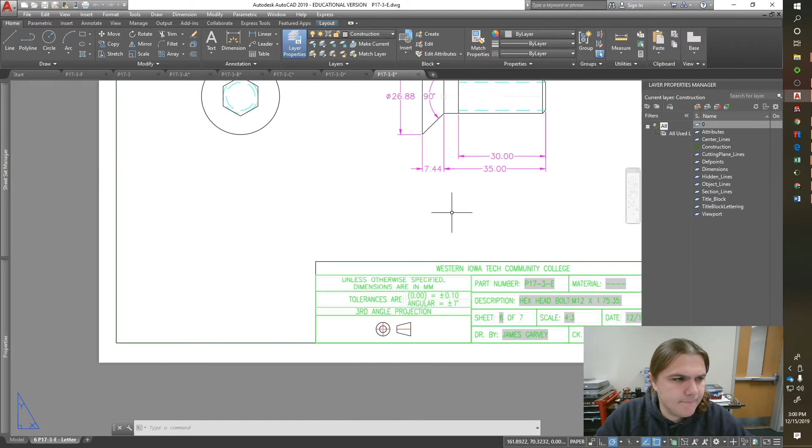And then now I'm going to open up all my drawings. So holding down Shift, I can select all of them and hit open. I'm going to get an error on this one because I was playing with the sheet set, so there's a field on it with the sheet sets earlier, so you can ignore this. This shouldn't pop up on yours. I'm going to, just for my own OCD, reorganize these tabs so they're all kind of in order.

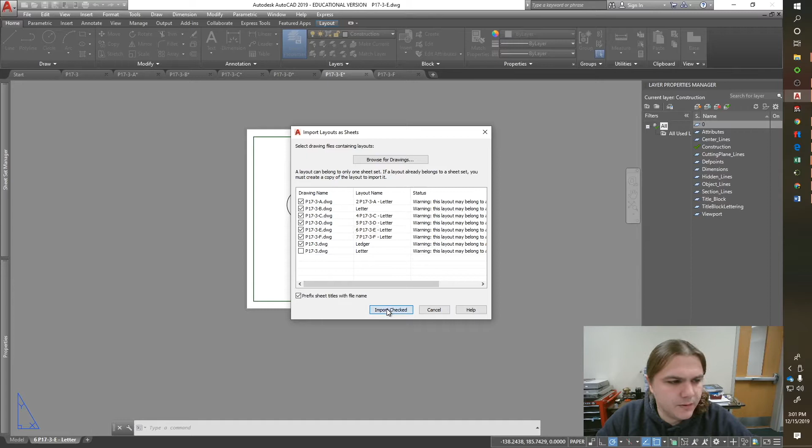And then now in my sheet set here, right clicking, no matter which one, so either on here or up here, I'm going to right click, import layout as sheet, and browse for drawings, and select all of these. Now I don't want the ledger on these, or I could rename some of these, but here I do want the ledger on that one. I'm going to import selected or checked, and now those are showing up in my sheet set.

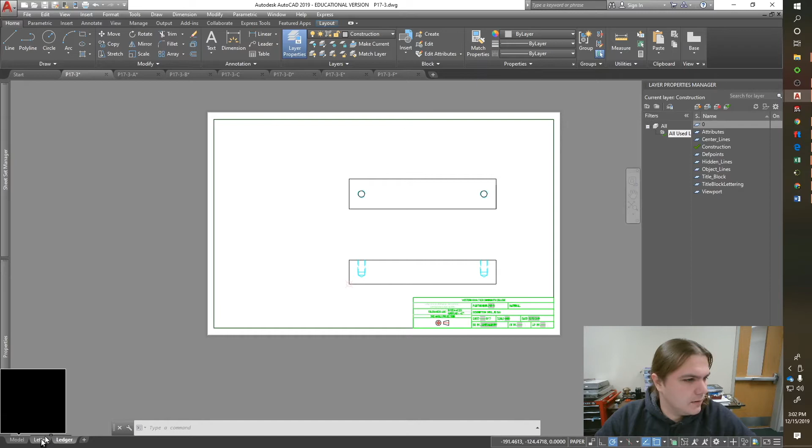Now if I double click on any of these, it will pop over to that drawing. And then when I'm done with this, I'll show it's just a right click on here, and then we're going to publish. Okay, so this is my P17-3, that's what I'm calling my assembly. I'm going to jump over to this one in a second. I just want to finish up what I've kind of started with on this last one here, what I've done with all the rest of them.

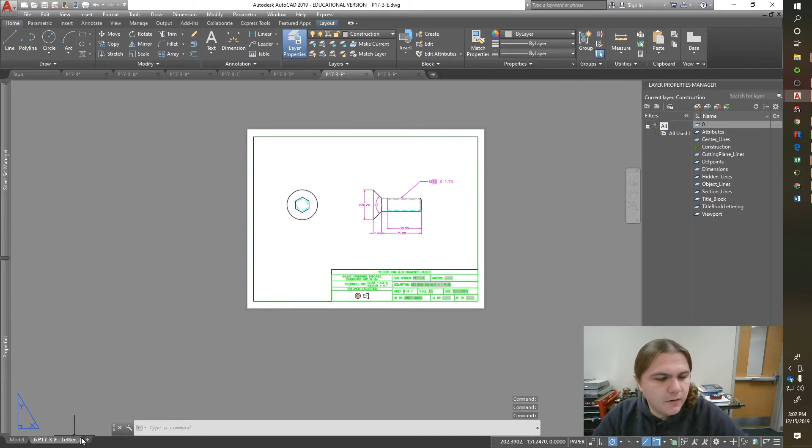I'm not going to cover the dimensioning, that's something you already know how to do. So what I have on, say, this one here is this little point, which I uploaded the templates again, and it should have this on here with kind of a brief description of what I got going on. This point is a block.

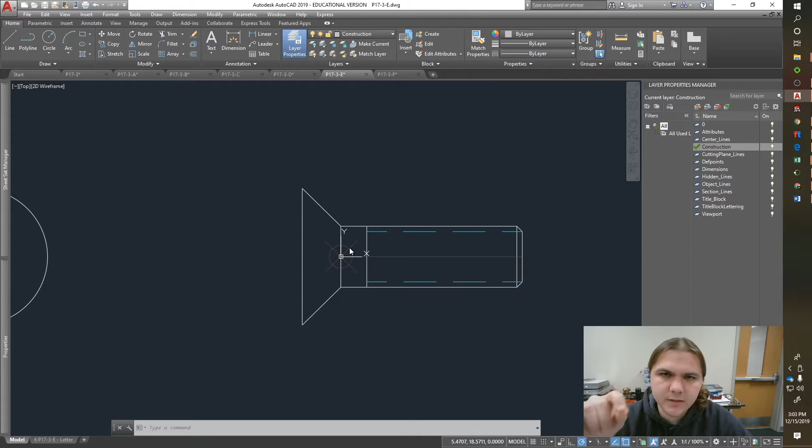If you type, which I'll demonstrate from the start in P17-3F, this block has attributes in it that we're going to use to generate our bill of materials on our assembly drawing. So I'm going to come over here and start from scratch. I'll make a new layer, attributes.

I want it not to print and all that, so I'm just going to give it a random color here. I'm going to type point, which I don't think I got my style set up on this one. There we go.

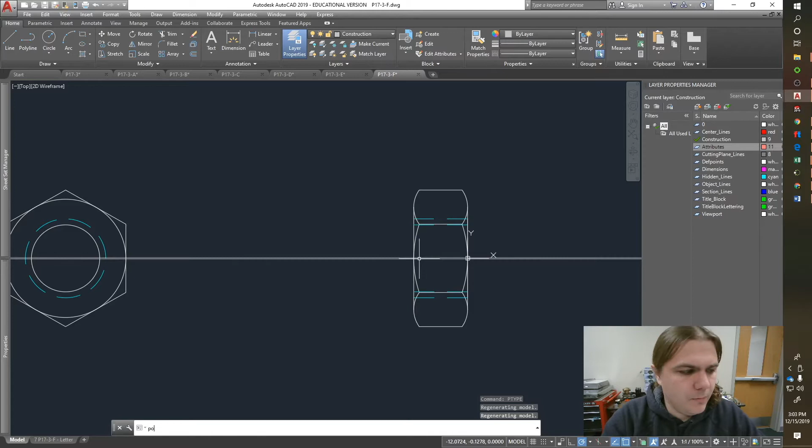Point, put it at 0,0, and set it to my attribute layer. So now what I'm going to do is type block. I'm going to name the block the same name as the file, because that's going to be part of the BOM table when we start that up.

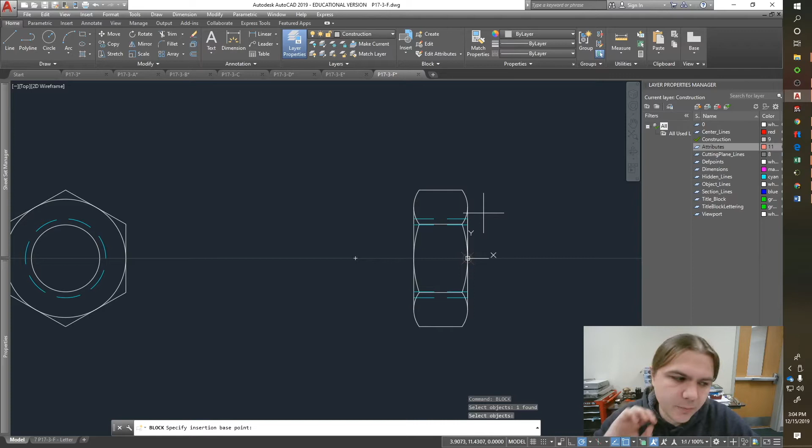P17-3-F. Now it wants me to select objects, so I'm going to select my point here, and okay. Now it's going to ask me the insertion point of the block, or the base point of the block. So I'm just going to click on the block, and now it goes into the block editor.

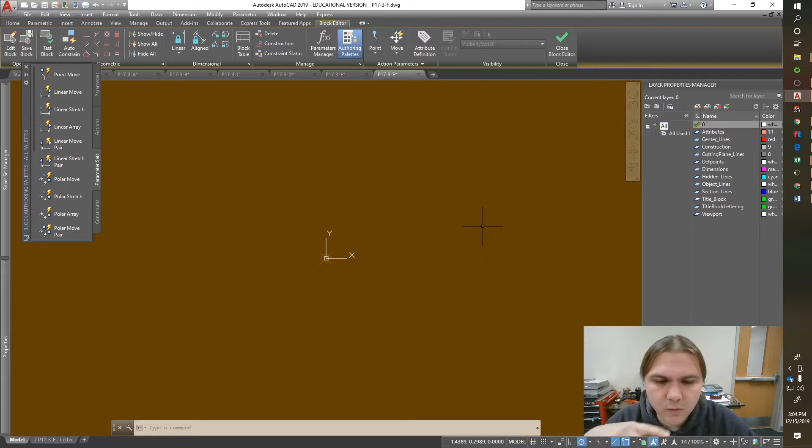The block editor can do a lot of interesting and cool things, but for the time being, we're just going to use the attribute definition. I have another video I'll kind of post around here. It kind of goes into more using the block tool as the whole part instead of just the attributes. There's some ups and downs on using that. I think if you want to try it, I'll share that video in the description below.

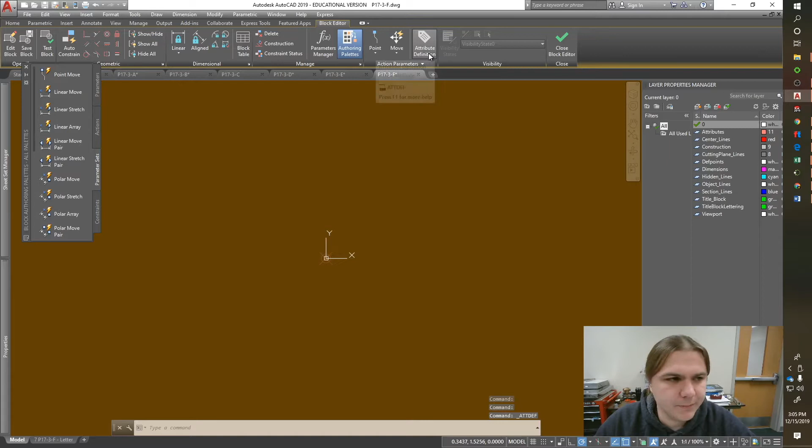Okay, so I've just clicked on attribute definition. So I need two attributes that I want to have associated with this part. I want the description, and well, in this case I wouldn't have one, but I'm just going to do it anyways, is the material.

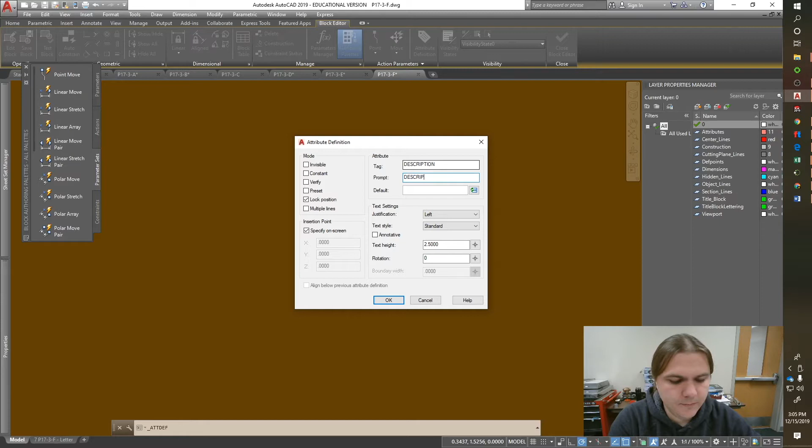So the name of it is, I'm going to just double it up. And then the default here is where you would put in the description of the part, which in this case, this is the hex head nut. So I'm just going to put in hex head nut, colon, and then I'm going to put in some of the details about it, which is an M20 by 2.5, which is the pitch.

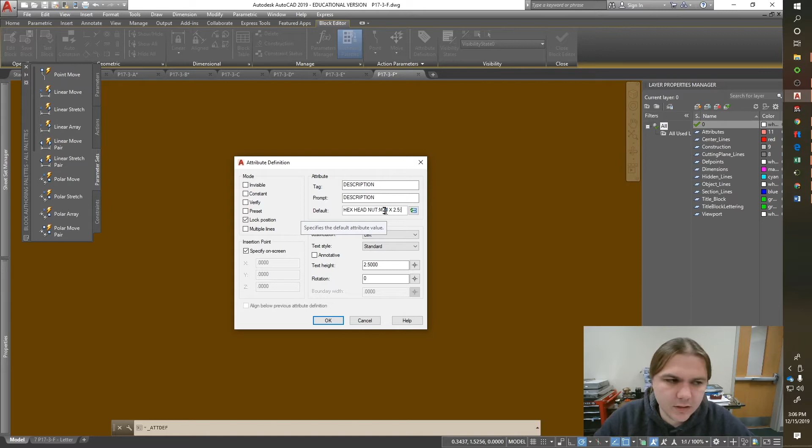I could go into, I can use fields in these too, so if you want to have the diameter, the width, or the length of something drive the dimension, you can just right click in here and insert field. And then usually from there, go to objects, object, select the thing, and then pick the property that you want to kind of have driving that area. I'm not going to do that in this instance. I'm just going to have this here. I want it to be invisible, so it just won't show up, and that should do it.

Now it wants me to place it somewhere, so I'm just going to place it there. I guess since it's invisible, this part doesn't matter, but I'm still going to set this to my attribute layer. Okay, so that one's done.

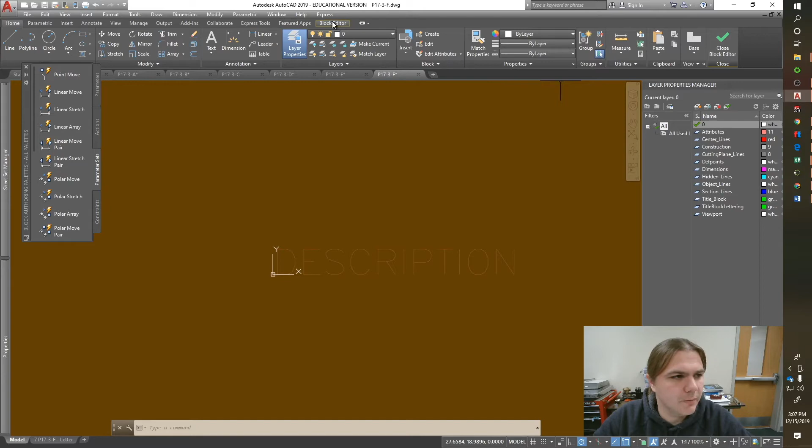I want one more. I'm going to go to, oh, it's the wrong tab. Okay, back to my block editor. Attribute definition. So in this situation, I wasn't supplied a material for this nut, which could be zinc or steel or whatever. This is where I would put that. So other parts define what the material of each part is, so that's why we're going to put this attribute in here.

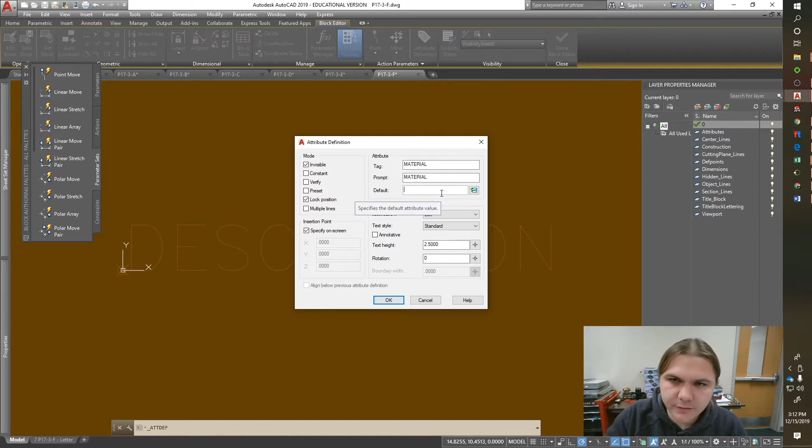The template that I'm supplying has these in there, so you won't really have to go through this if you use that template. I just want to show you how I did it. I'm gonna hit OK. Place my material block attribute. Do a match properties and make it the same layer, and then close. Now I want to save my changes.

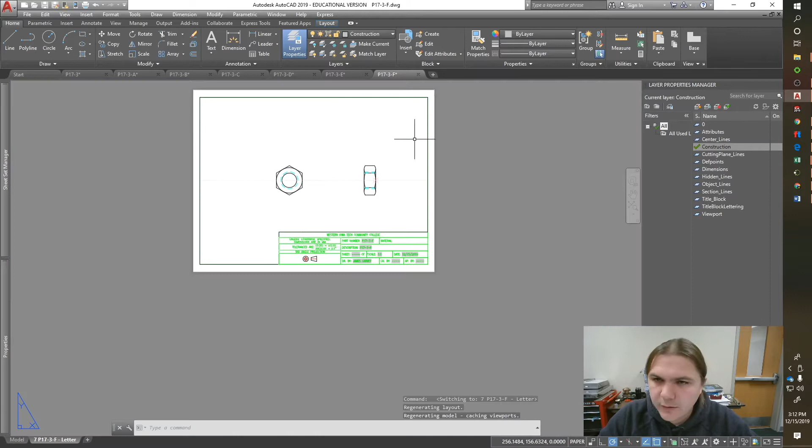So from there, then I'd go in and I'd dimension my part, and now I'm ready to start assembling the assembly.

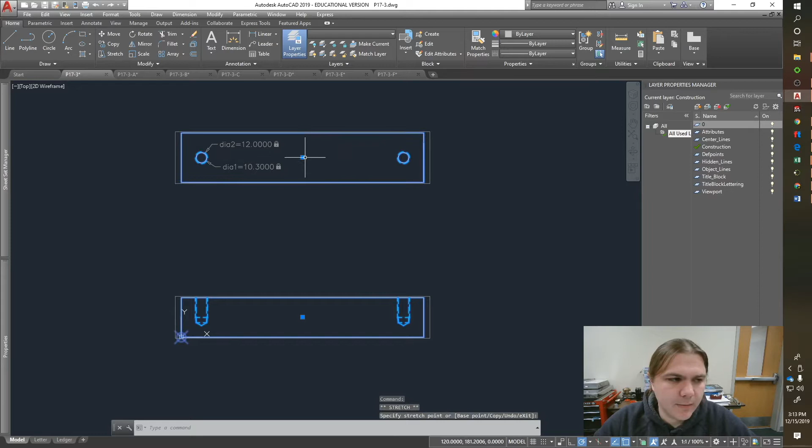What I'm going to use for this method is groups, just to keep each part grouped together. So I'm not having to worry about accidentally deleting a line or covering something, and making it maybe a little easier to select each individual part.

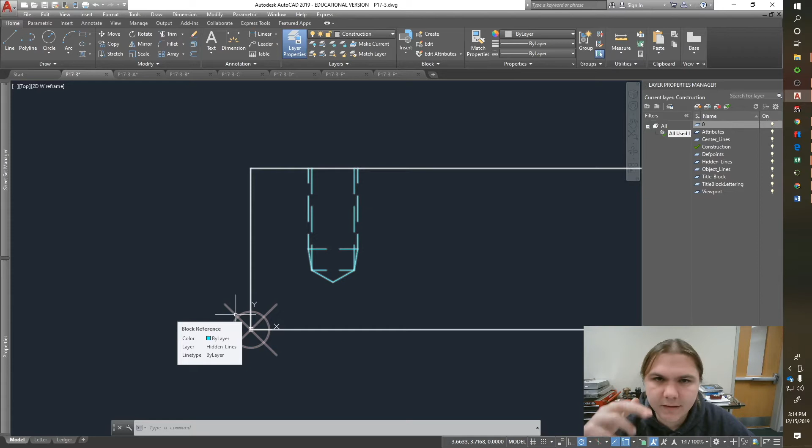That point there, that's basically all the information of each part. If I copy, say, that washer—no, sorry, that wasn't a washer, that was a nut. What I need to be careful of is if I'm copying, say, a bolt from the front view and up to the top view, I got to make sure that the front or top view only has one of those has that attribute block, because if both of them had that in there, then that's going to count the bolt twice, even though it's only in there once.

So I'm going to run through how I'm going to put this together. I got this already in there.

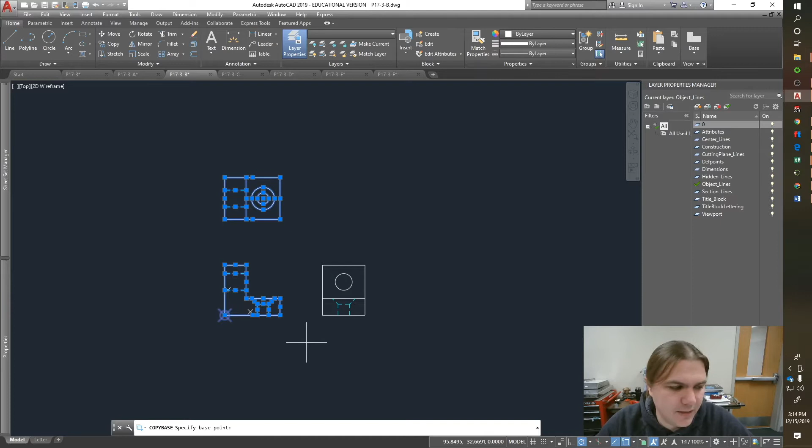With this bracket, I'm only going to need my front and top view. So I'm going to do a Control-Shift-C, which will give me an option to select my base point. So I want my base point right here. I'll right click, that's not going to do anything, so I'm just going to click here. Now I'm going to paste it into my assembly.

Plop it really anywhere, and I'm just going to group with just G the front and top separately, so I can kind of move them around freely and place them where they need to be. In this case, this needs to go right there. And then let's see if this works.

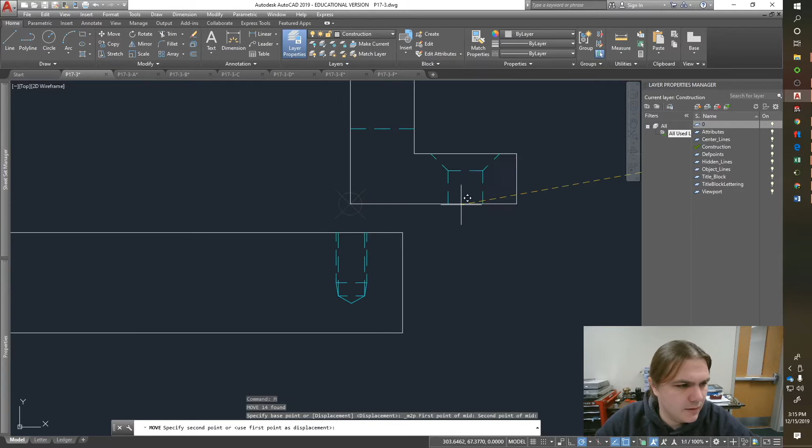Move, snap overrides, mid between 2 points. I just saw this one today. So from here to here, now I'm in the middle of there. Let's see if this allows me to do it again. Nope, so you can only do it once, of course. AutoCAD has something cool and then immediately ruins it.

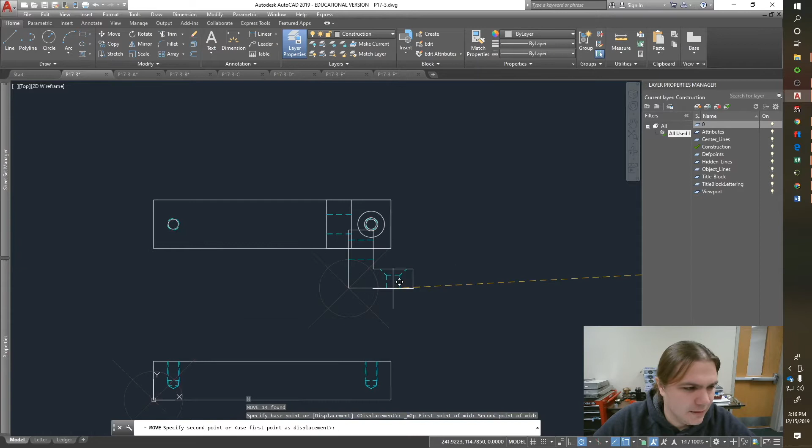Okay, move, right click, mid between 2 points, and then I will just drag it from there. Okay, that wasn't too bad.

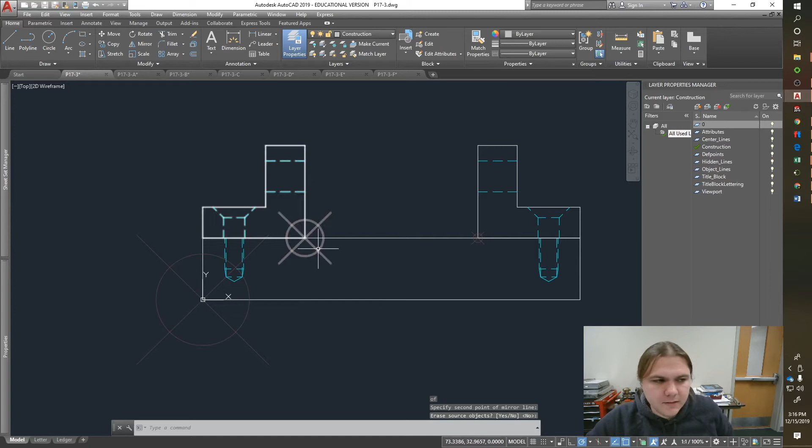So now I need two of these, so I'm going to mirror this about the midpoint of that. This would be a case where I want 2 of these attribute blocks in the assembly, so when I do my bill of material, which I'll get to, and you'll see why I'm doing this, I want it to count 2 of these.

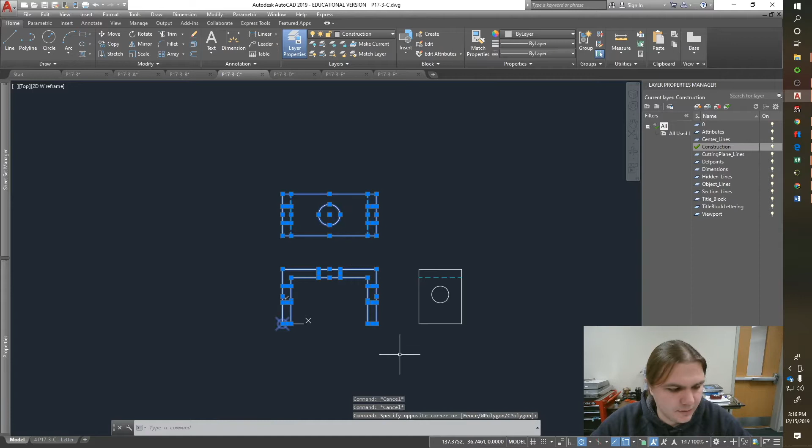So going over to C, I just need the front and top again. Copy. Oh, I screwed that up. I want to do Control-Shift-Copy, and let's think here. Where'd be good? Okay, that's right. That wouldn't let me do that.

I'll copy from there, Control-V, and I will place this in here. I guess that didn't really matter where I had my base point.

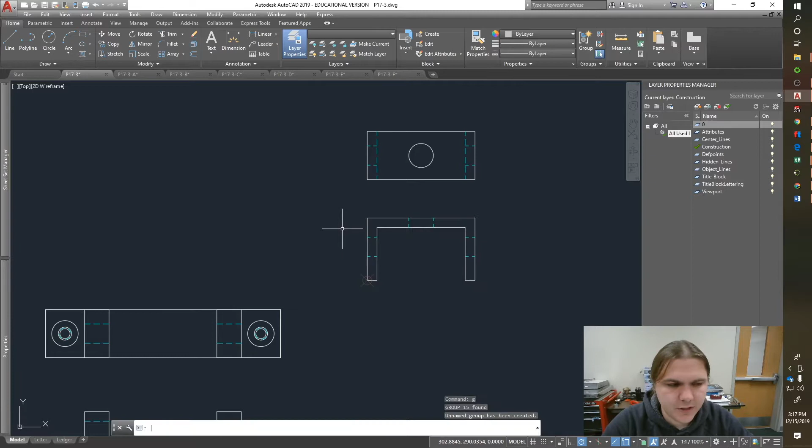I'm going to group it, I always want to do GR, it's just G, and I will move it into place.

Let's see here, between 2 points. All right, so you just keep on repeating this process of copying and pasting. I'm going to do one more here with the nut, the bolt.

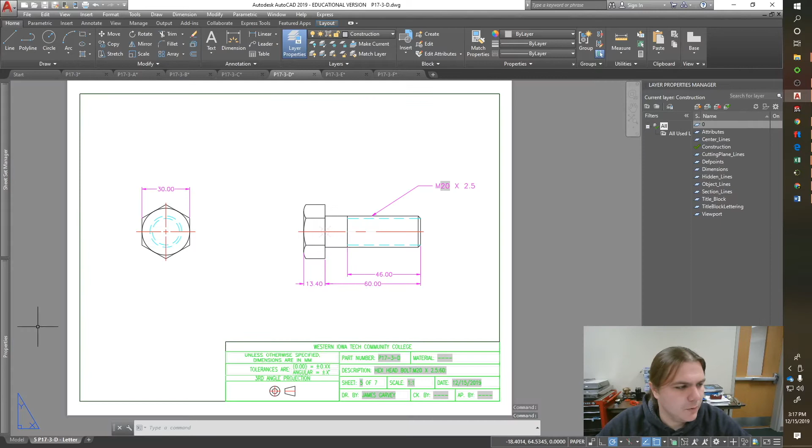I only need the front view on this one, so Control-Shift-C. Paste it in, group it with just a G, do a quick rotate and move.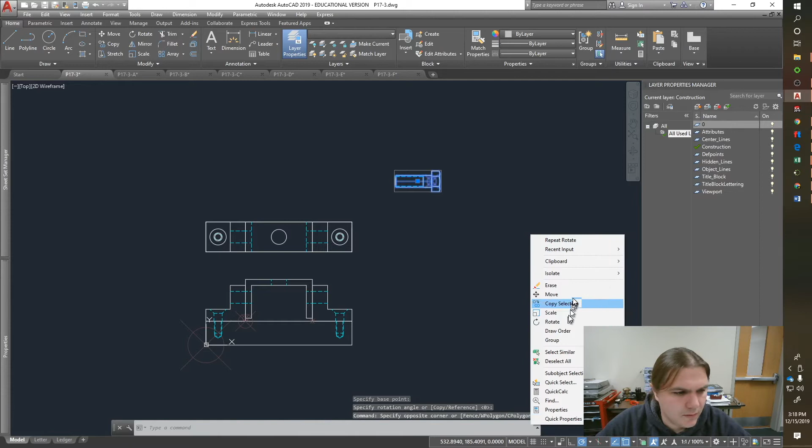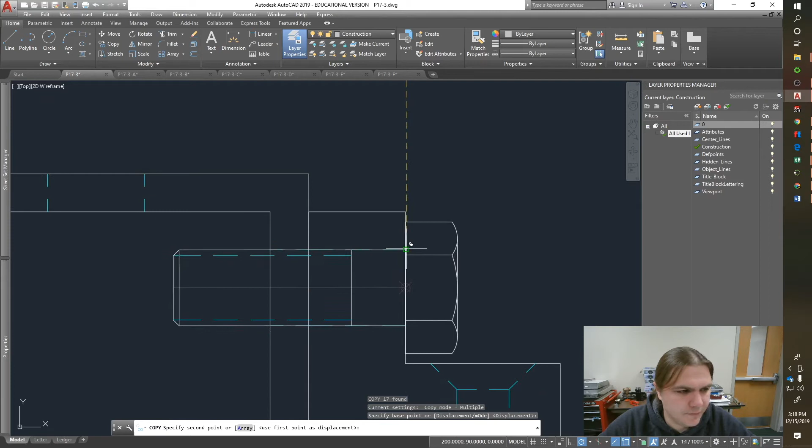Place, copy. Okay, so this is where, now that I'm copying it from the front and top, I have two of these attributes, but this is the same part, front and top, so there's only one of them in here currently, so I need to get rid of one of those.

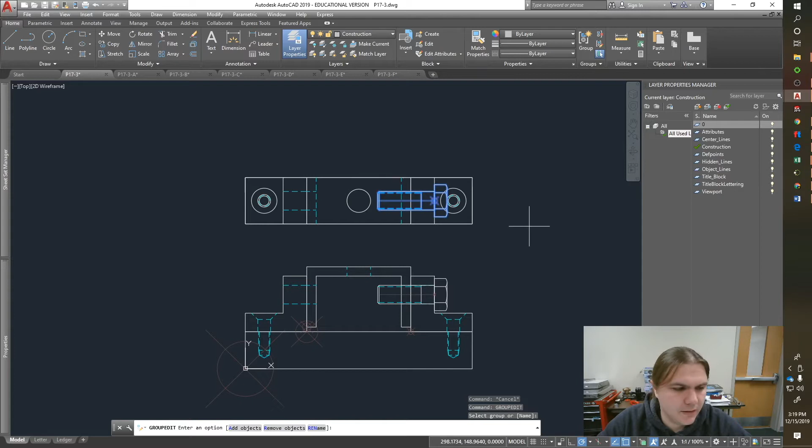So I'm going to do a group edit, group edit, I'm going to select, let's do the top, and I want to remove objects. I'm going to click on this, that just gets that outside of the group, and now I can delete it.

Okay, so from here, I'd keep on adding in my parts, and when I'm done with it, I want to do a section view of the front view, and I'm just going to have no hidden lines on my top view, because having the hidden lines there in this instance really doesn't help me.

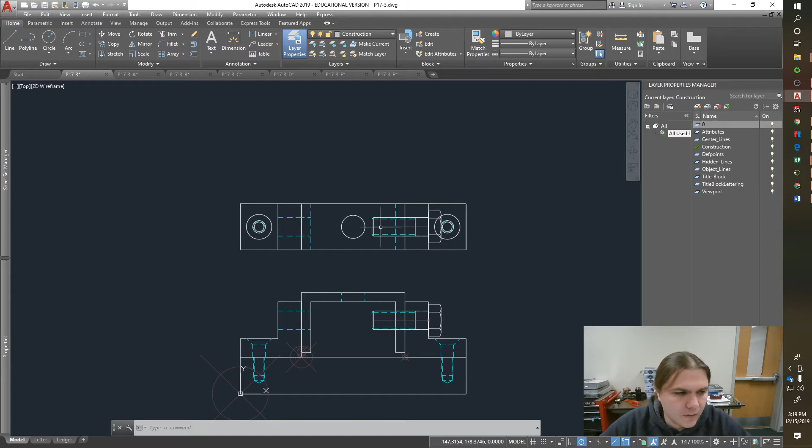So in order to trim things out, you can keep things in groups and trim them out. So if I select this group here and hit trim, I can start trimming out this hole here around that group. The only problem is it has like every single line, so you have to be kind of meticulous about it. So this little area there, probably wouldn't ever notice it, but it is there.

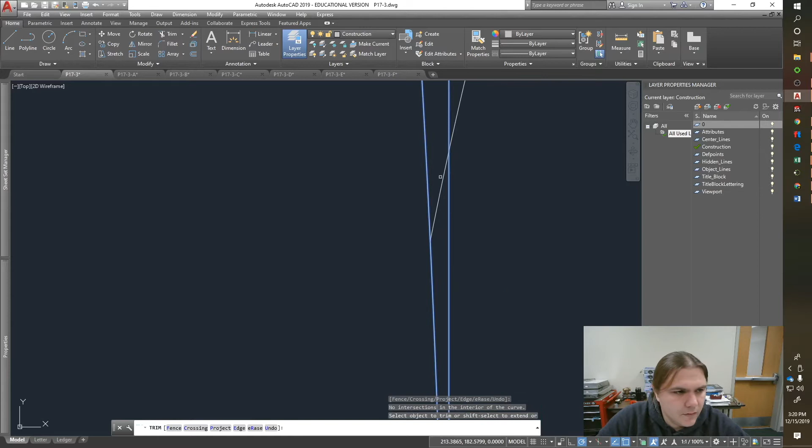Probably could do a green select like that to get rid of it. That's good there. And then I wouldn't need to see any of the bolt paths basically here, so trim and get rid of all that.

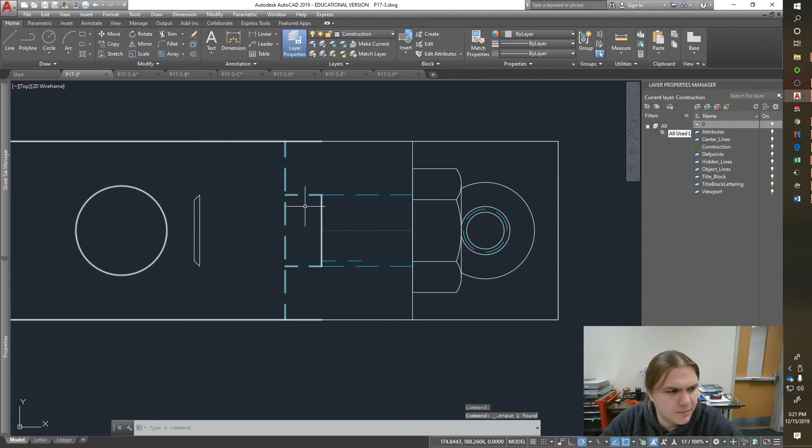Let's do a group edit, and we'll remove items, objects, select all those. That's a problem with the group there, is even the blue select seems to want to just select everything if it touches it. Yeah, I got one last thing to remove from the group here.

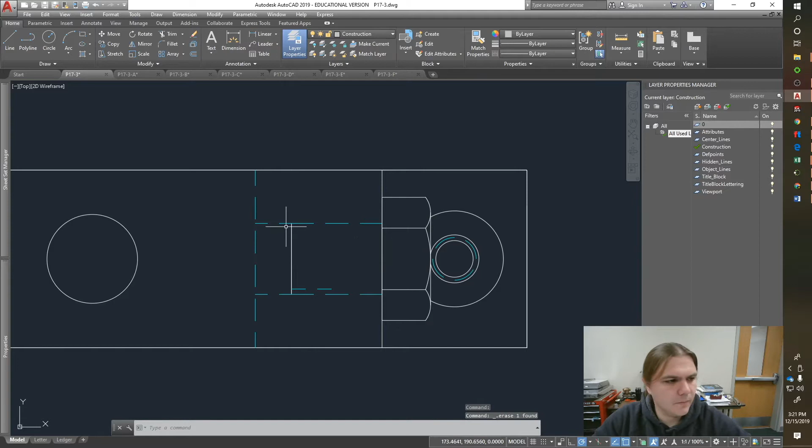See, that's kind of annoying, surprise, surprise, AutoCAD has something annoying. I want this to be out of there. There we go. That is... oops, I trimmed more than I wanted to.

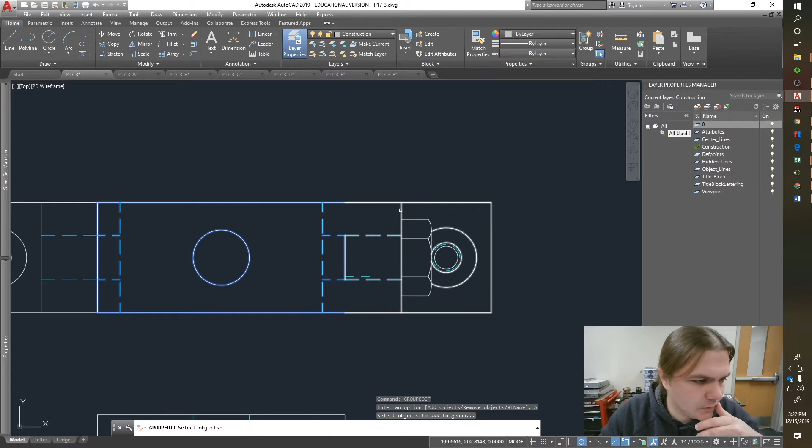Let's see here, let's do a group edit. This might be a good option to add object. Shoot, that's not gonna work. So if I just do a line, now I can now do the group edit, select the group, and add objects.

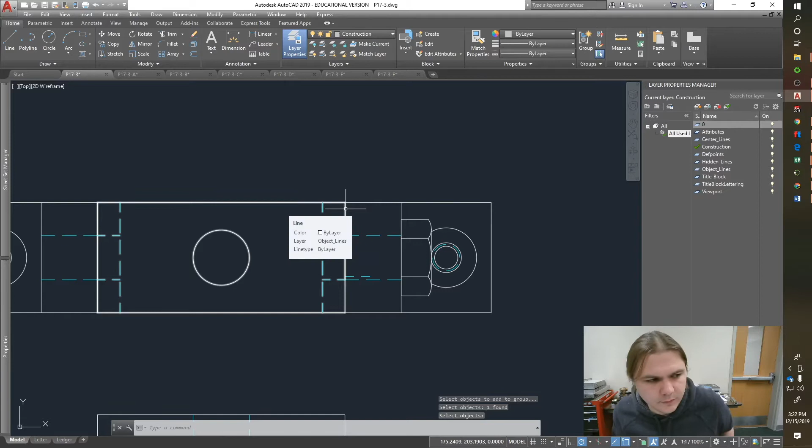I should have been a little more careful with my trim there, but that's how you handle that. If you want a view with no hidden lines, or just want to trim things out, you can keep them in groups and then select where you want to trim.

So in my front view here, since I'm going to make this a section view, I'm just going to cut straight through this part. That basically makes it so that, other than your fasteners, you leave your fasteners unsectioned.

But the brackets and whatnot you would section out. So when I go to section this, I want to make all my hidden lines visible. Since this is grouped, whatever I select up here for the layer type sets everything in that group to that layer type. I want them all to be object lines, so I'll click here, and now this part has all visible lines.

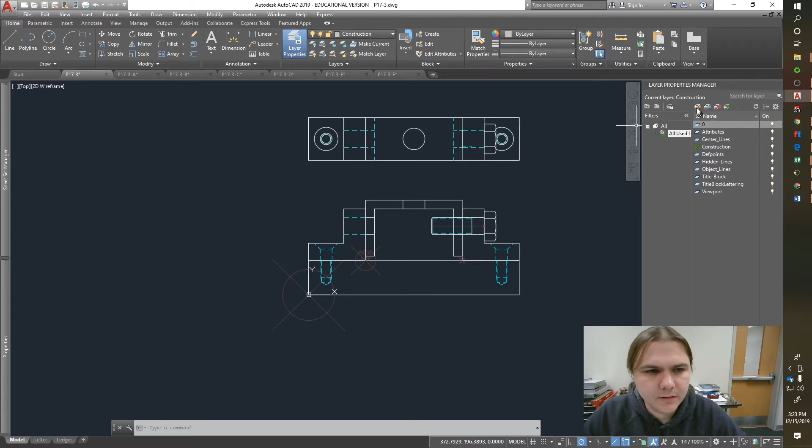Apparently I don't have section lines on this part, let's make that real quick. Section lines, and then just hatch it like you normally would. This part here is going to be steel.

Steel, click, click, and click, and click. And then just keep doing that for each part, and it's just like you would do any other... well, okay.

So the last step on this, after you get it fully finished, which obviously this isn't, is to do a data extraction, and that's where these point blocks come into play.

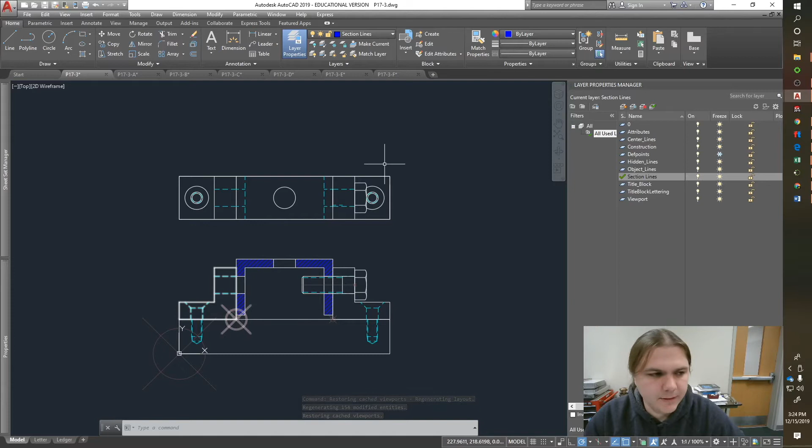Let's do one thing before that: attribute sync. It says enter option, so I'll do name, and then asterisk, which selects all of the blocks and attributes and syncs them. Press enter.

If you want to be more meticulous about what attributes you want to sync, you could actually select or type in the actual name of them. I want to do that one more time just to make sure I actually got that.

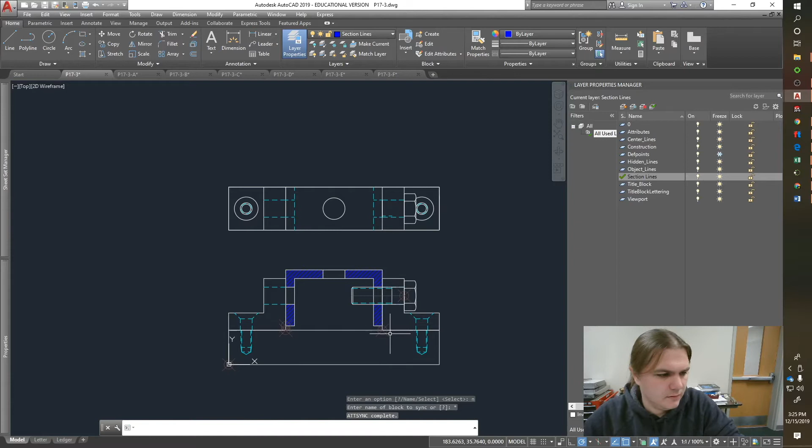Okay, so now data extraction. And in fact, I should probably do it here. Let's try this. All right, data extraction, I want to create a new one.

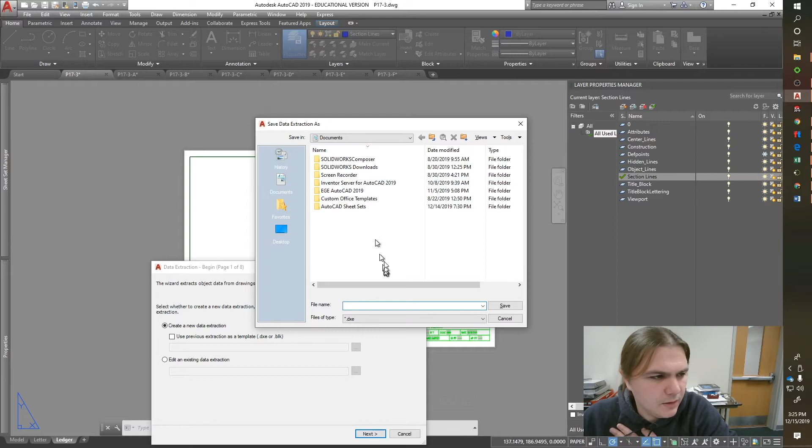It's asking me where I want to save it. I'll save it in that same folder as all of my parts, and name it the same thing. Oh, I've already done this once before, I'm just going to replace it. So yes, I'll go next.

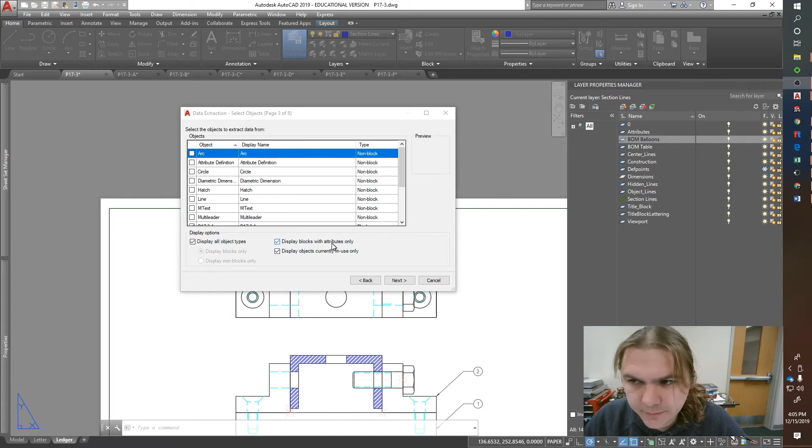So now in this part of the dialog box, the only thing I need checked is display blocks with attributes only. That's where we're getting, when we made those points with those attributes, this comes into play. So uncheck all this, make sure each of the blocks you know are in your assembly are checked here, which these are the only four I currently have. Now I'll click next.

The first time you go through, these are probably all checked. The only thing we need is attributes, so simply uncheck all these, and make sure the properties, the attributes you defined in that block, are there - the two I had were material and description, so that's good.

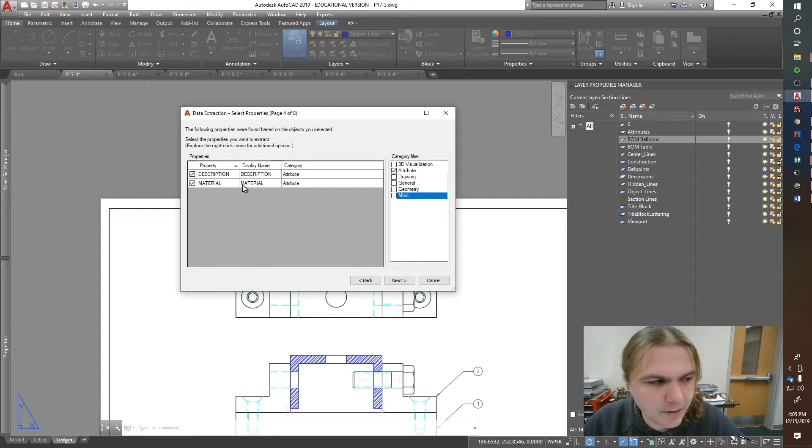Click next. Now you can kind of see here the start of the table we'll be using. You might want to start moving things around the way you want them to display in the table. It's as simple as left clicking on it and dragging it to where you want it. In that case, I wanted that one over there.

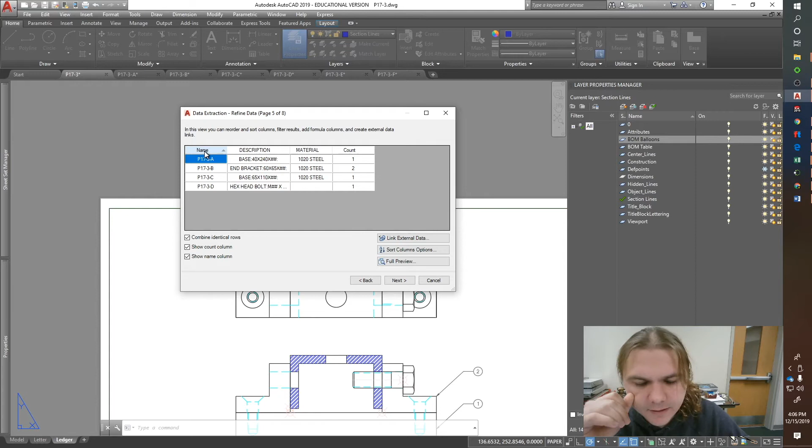The other column we might want - I'm still playing with this to see if I can figure out a way to make this work - is each row needs to have a number. So this P17-3A should be number 1, B should be 2, C 3, and so on.

We can do that manually once we insert the table, but there is a formula column, and I'm not going to hold my breath that there's a way to make this work, but I feel like there might be some option to make this formula column basically our number display. I don't think there's a lot of options for what you can do with this formula, unlike other areas where AutoCAD allows you to write a formula.

But I'm just going to put one there as a placeholder, and replace it once I get the table in my drawing. Yeah, so I can just drag that over there.

Okay, so it came up with decimal places. If I wanted to format that, I right click on it and set column data format. I want this to be fractional, or I could keep it at decimal and set the precision to no decimal places. Say okay - you can do that with a lot of these other columns.

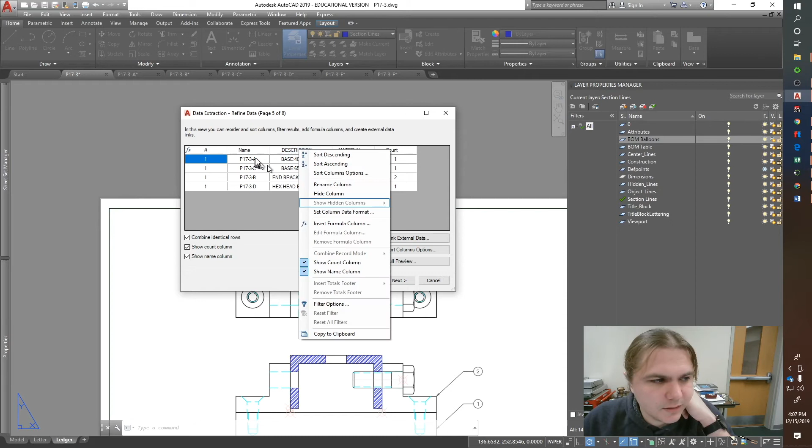Oops, I just accidentally clicked on that, adding a new sort columns option. The only sort column option I want is that the name is ascending, meaning I want the table sorted alphabetically by the part's name.

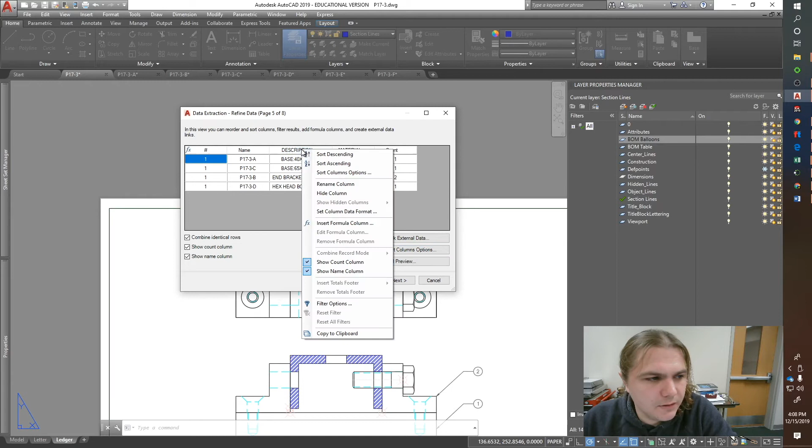That name is coming from, if you remember, when I told you to name those blocks the same as the file. That's where that's coming from. I think that's all I got. So you can see, I just did it again.

Remove. There you go. Right clicking on this, I can do a set column data format. I've tried it here where I set the format to have the column all capitalized. I'll show you in the next step here.

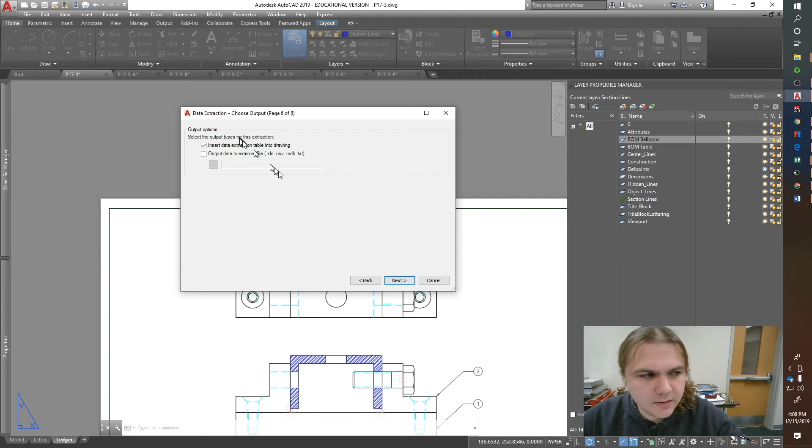So I hit next, insert data extraction table into drawing, and now that we got some options here, enter a title for your table. I want that to be BOM table. This won't come in with all these symbols if we can have this set so that all the text is uppercase. This is that GDT font, so all lowercase letters are a symbol.

As you can see here, there is a table style option. I currently have a BOM table. I made that. If I click on this button here, I can create a new table style, which I have my BOM table.

This is what makes me think we could do something with that formula column, because look, it says 1, 2, 3, 4 over here in this preview, which after I insert this into the drawing, that doesn't seem to actually do that, but it might be one thing I can try. But like I said, I think there's something we can do with it. I just haven't quite figured out exactly what makes it work.

So once you go in here, you can set new, BOM table, whatever you want to call it, and then modify. Up here in the cell styles, we can click on each of these and then set certain predefined styles that we want.

So the format for the text, that's where we can find things like text uppercase. I currently have each of these set so that the text is set to uppercase. The alignment of the cell, so in the data, I want my alignment to be set to middle left so that the text doesn't float in the center, and you can read it left to right a little easier.

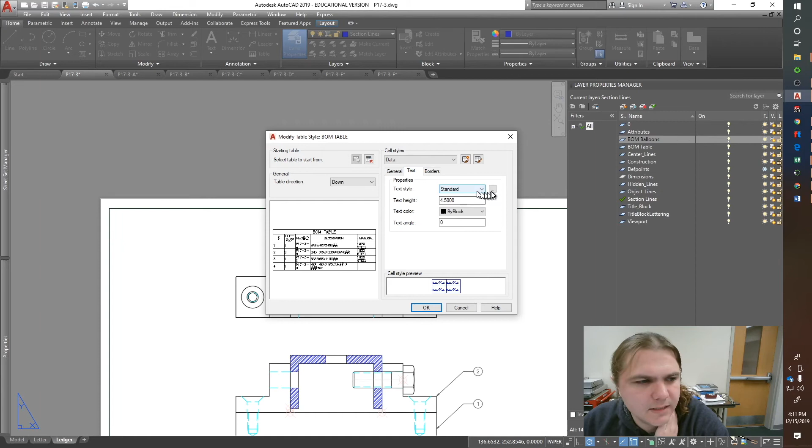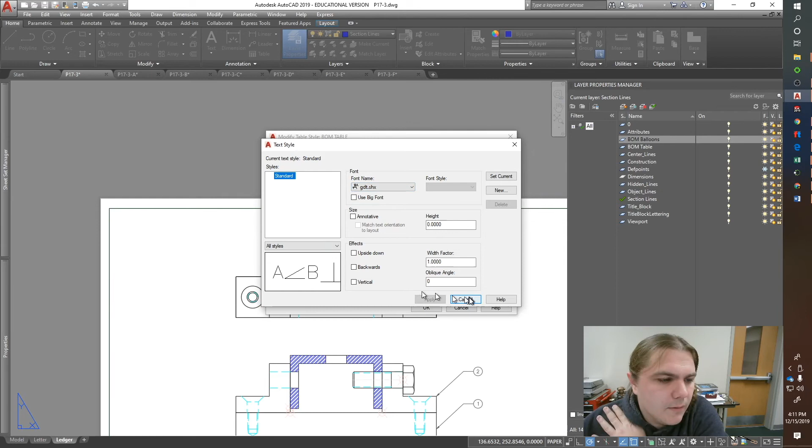If you don't want to mess around with making sure that it stays uppercase, you can change the font type here. But because I did that uppercase, it should work. And then the BOM table's text or font will match the rest of the drawing, which is preferable. I think that's enough there.

You can set that current or whatever. And now I should be good to go to hit, give your table a title. I just called it BOM table, hit next, and finish. Now let's see how this turns out.

Okay, so that worked. Everything was uppercase, I don't have any symbols. Everything is kind of laid out the way I want it to be.

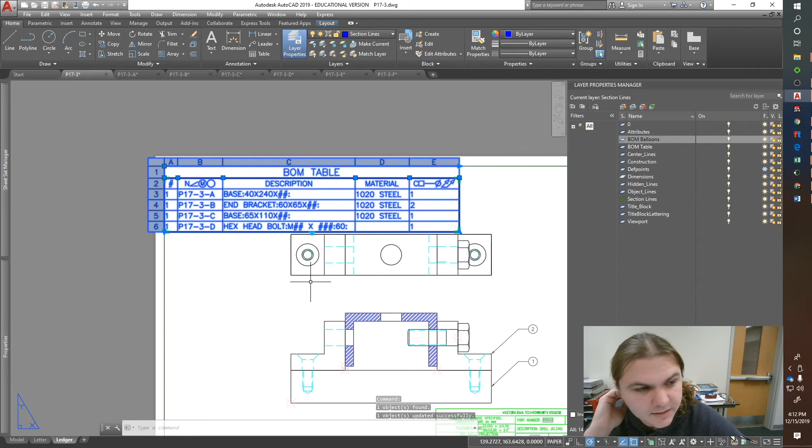The other thing I want to try here, see if we can get that to actually update. Otherwise, we're just gonna have to manually do it. Do update table links. Oh jeez, yeah, that doesn't make any sense. Oh, AutoCAD. Okay.

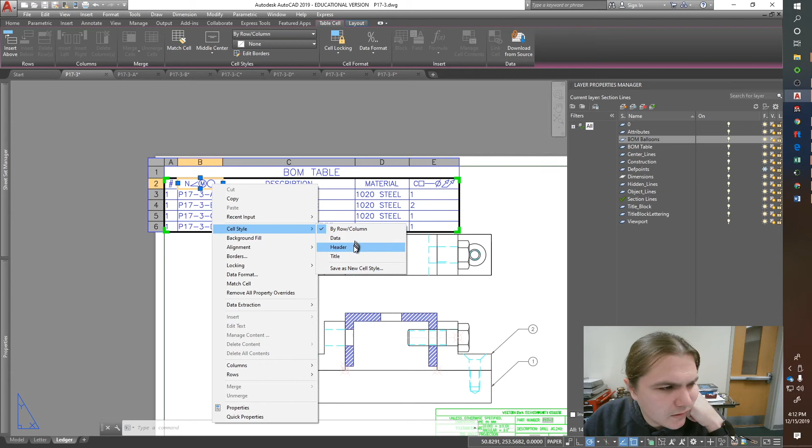Let's see here. Cell style. Huh. By row and column. So if I do a data, let's redo that update. Of course.

Okay, let's fix this up real quick. I'm gonna try one more thing. Yeah, it didn't do anything. So by default, these cells come in locked.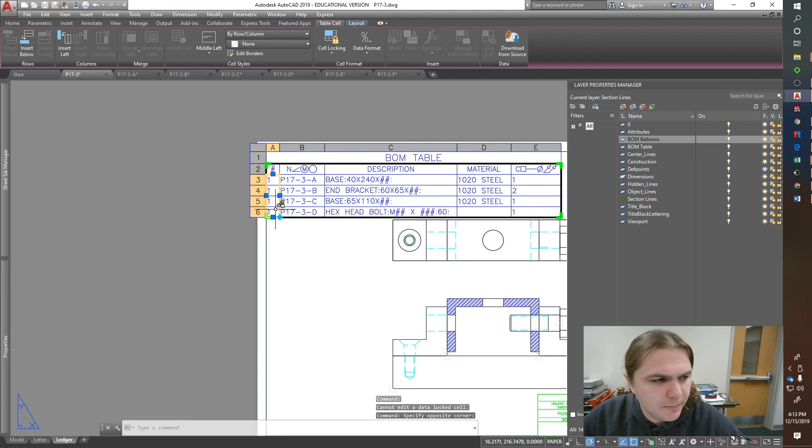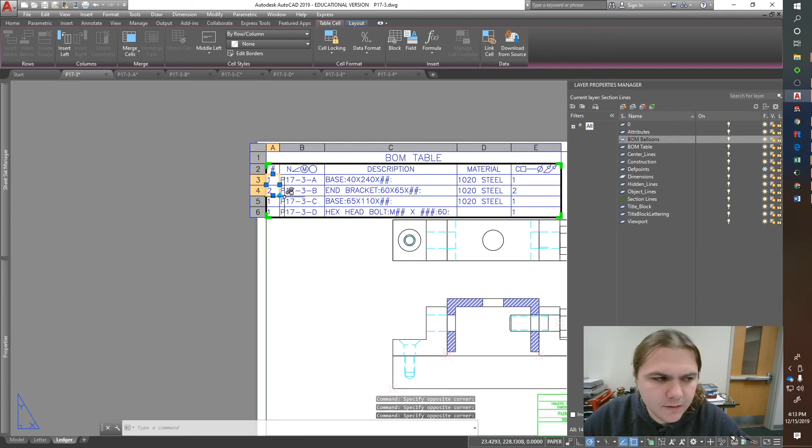I'm gonna unlock all these, and then I'm gonna make this one at least 2. And then selecting both these cells, and then clicking on this diamond shape here and dragging down, that'll auto-fill out those numbers. So if you have a lot of them, that'll save you a lot of time. You just have to make sure the first 2 are 1 and 2, and then you should be able to drag down and have them all set up.

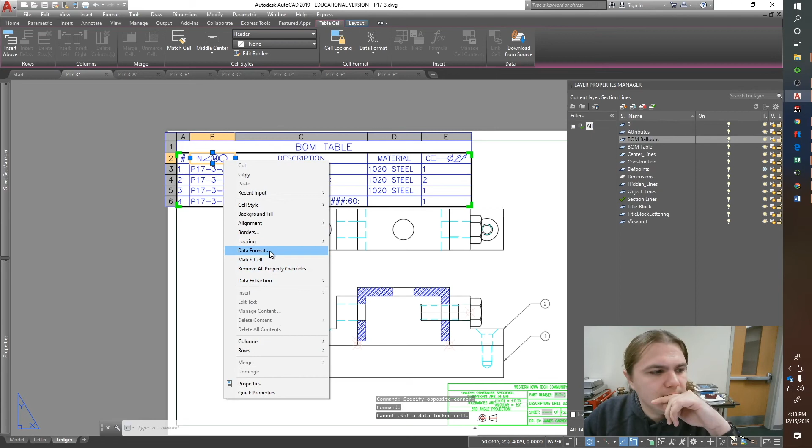I don't know if I can. That just doesn't make much sense, does it? Well, let's see when I do the publish if this maintains.

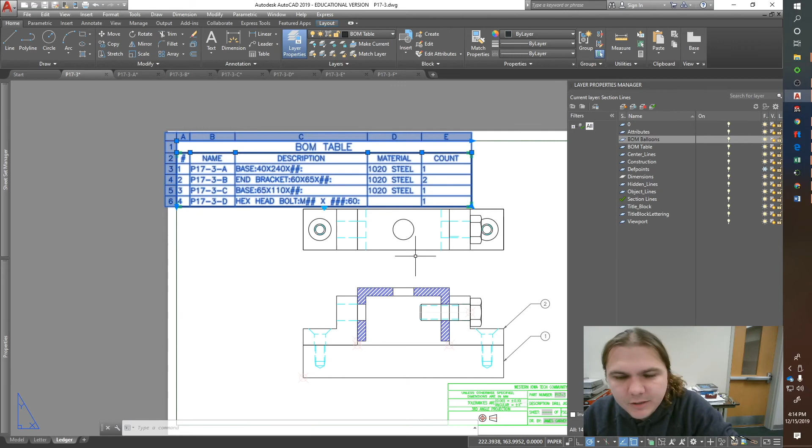I did create a layer for the BOM table. You don't necessarily have to do that. But make sure you set it on a layer that doesn't have a really hefty line thickness, because otherwise your font will come out all chunky and gross looking.

And then I did the same thing with BOM Balloons, which I have 2 of them here. That's under your multileader styles. If you don't already have it, you can make one. Make new BOM Balloon, and then make sure that under the content tab, the multi-leader type is a block and the source block is a circle, and that will allow us to put a number in that tag there. So hitting OK.

I also made a BOM Balloons layer. You could probably put that on the dimension layer, but it's kind of nice having multiple layers for stuff like that in case you need to hide all the BOM Balloons or whatever.

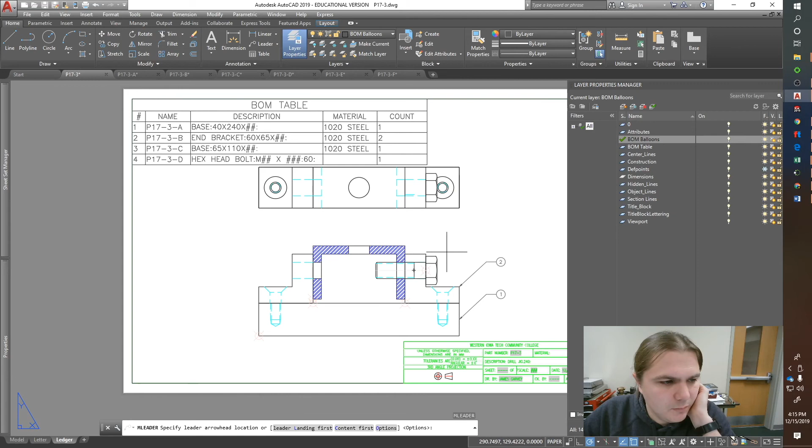So then MLD to start up our multi-leader, and I'll put a BOM Balloon on, say, this bolt here, and place it there. Tag number, the bolt was number 4, and click OK.

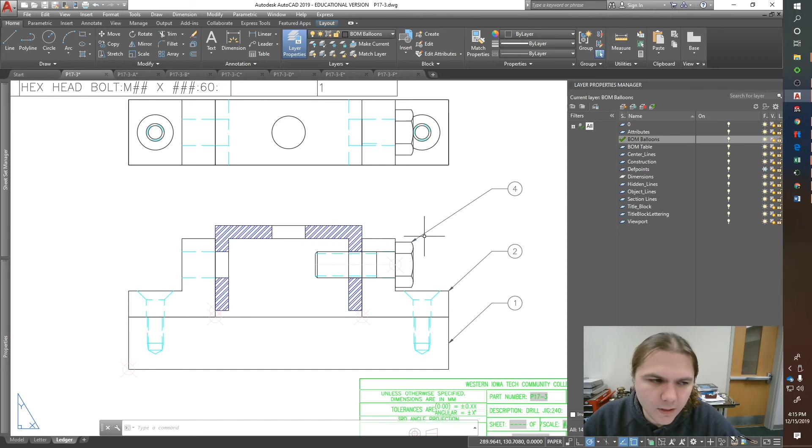You can be extra meticulous like I am and kind of keep things in line, nice and pretty looking. Otherwise, at least lay them in there so it's easily read what part it's pointing to. Like take this one for instance.

I got this going to the middle of the part. If I had just gone to the top here, it's kind of confusing as to which part it's pointing at. Yes, I have this one up here pointing to that, so it should be fairly obvious, but I wouldn't leave anything up to a guess.

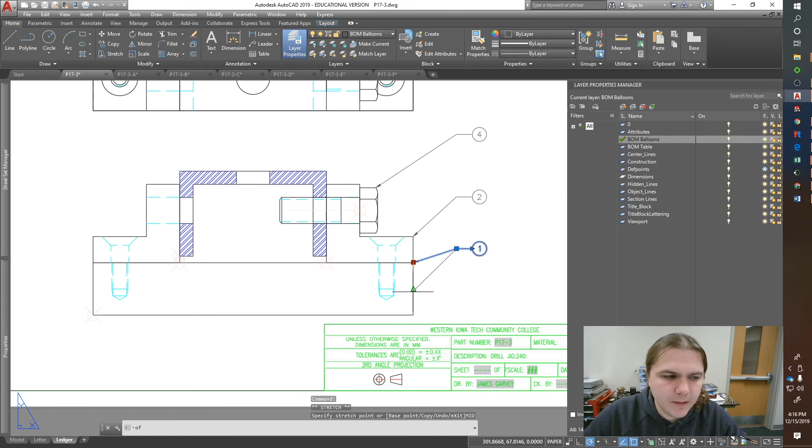So going back down there, it doesn't have to go to the middle, but it can. Let's think here. What else do I need to cover?

Each of your sheets should have a number. So this will be my first one overall, and the order over here is how, when we go to publish it, they'll be plotted out. So you can drag those around depending on how they came in.

In my instance, the dimension drawing was at the bottom, so I simply dragged it up to the top, but everything else seems like it should be in the right order. Clicking on this, come on.

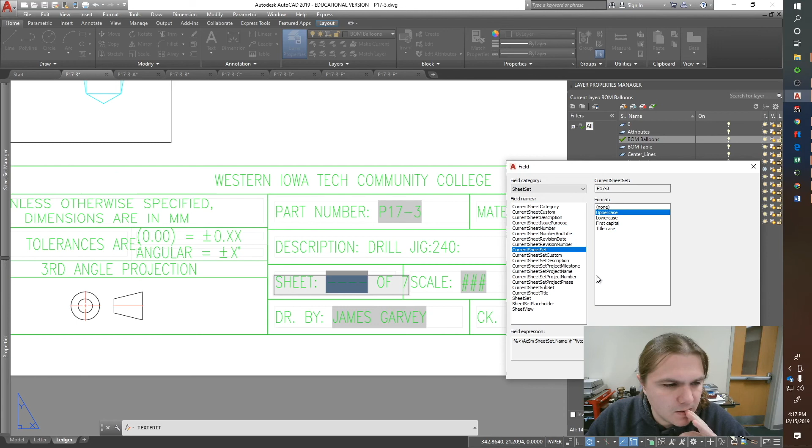So I can either just put in 1, since it's my first one, or if you want to get fancy with fields, if you go to... I think that is... I thought it was the number. Well, I'm just going to delete that, put 1, and then go through each drawing and make sure you got that set up to the right number.

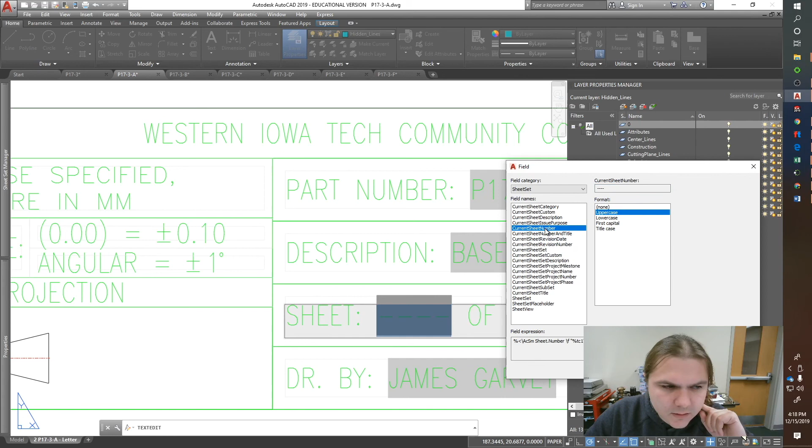Yeah, that's the one, huh? Must have changed something. Oh, it's 2, and so on and so forth. I'm not gonna fix all these.

Okay, now if I want to publish this, I come over to Sheet Set Manager. Something that I ran into, and hopefully this doesn't happen again, is only the first row in my table stayed or plotted, and everything else was blank.

There was an option that popped up when I hit publish that I think might be the culprit, so I'm going to not click on it and see how that turns out. So right click, publish, and I want to publish to PDF. I'm going to put it in the same folder as I have everything else.

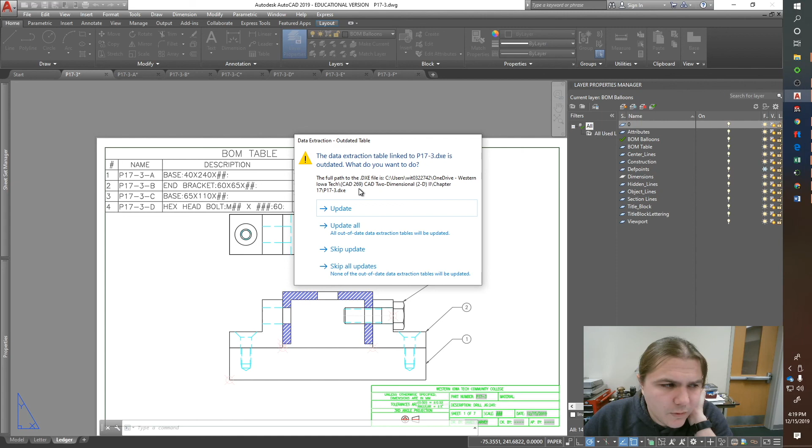Okay, this is it. So it says if I want to update the data extraction, which makes sense that you'd want to do something like that, but at the same time, we haven't changed anything, so I'm not sure what it's updating. So I'm just going to skip all updates and see what happens.

As you can see down on the status bar here, there's the little printer icon, and right now it's going up and down. Make sure I got, okay. Once it's done publishing, there will be a bubble that pops up and tells you that it's done.

You can go over and check your PDF to see if everything came out right. It should even tell you—yeah, it's telling me right now what page is currently publishing.

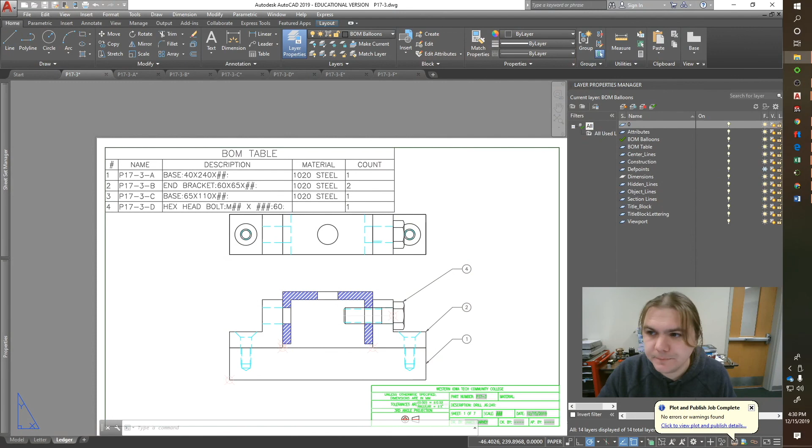I'll skip ahead and then we'll see if my PDF actually succeeded in publishing. So here's the balloon that pops up, tells you that it's all done. I'll go over to where I saved it, over in this folder. Double click on that and we'll see how that worked.

Okay, that seemed to work. Now each page is in there. If it opens up in Edge, there's a little button here for contents and you can go to each page. Looks like I might want to rename each of my sheets so it's a little cleaner looking.

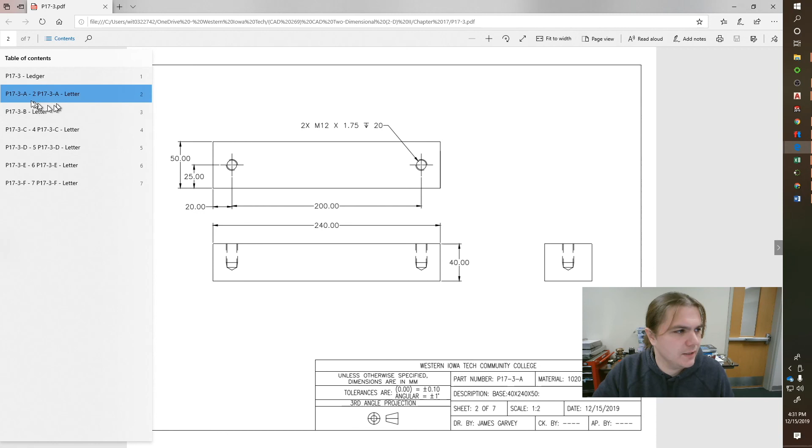So it's not repeating like that and whatnot. But other than that, it's looking not complete, obviously, but it should reduce some tedium with making all of these assembly drawings and uploading them, especially to Canvas.

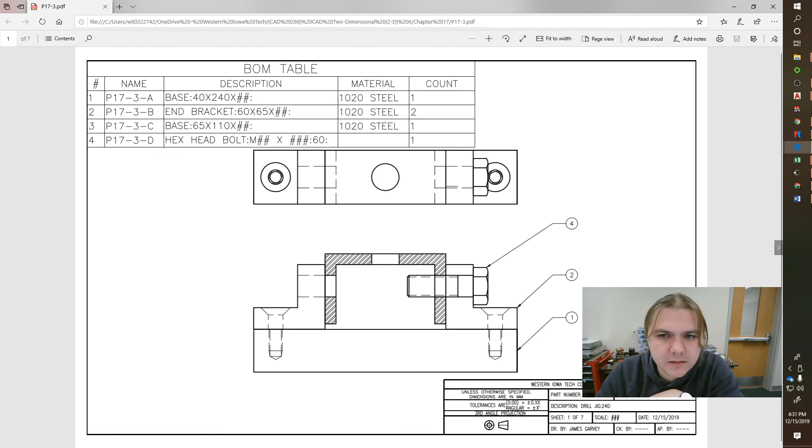In a workplace, you'd probably still have to make the PDFs for each individual part because those are going to have to go into a database, but still something kind of useful to use.

So currently I'm probably only going to have one assembly assigned, but if this goes smoothly enough for everybody, and we have time to do a couple more, we're definitely going to try to hit those up.